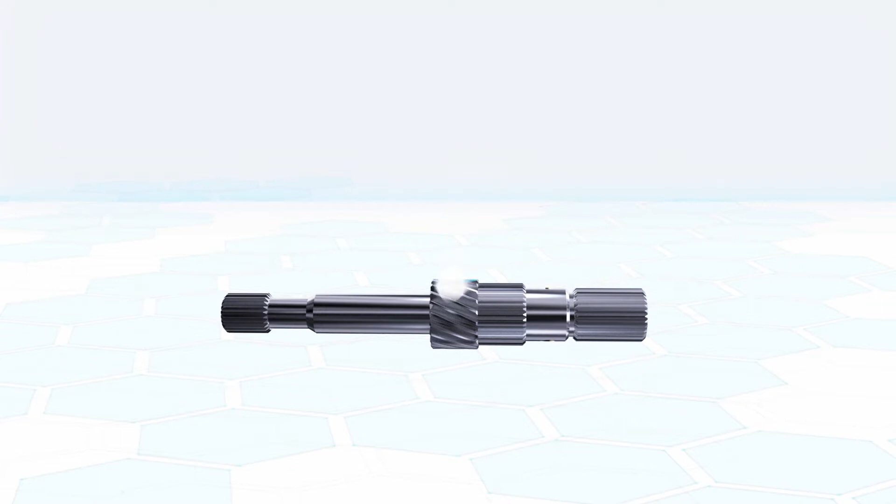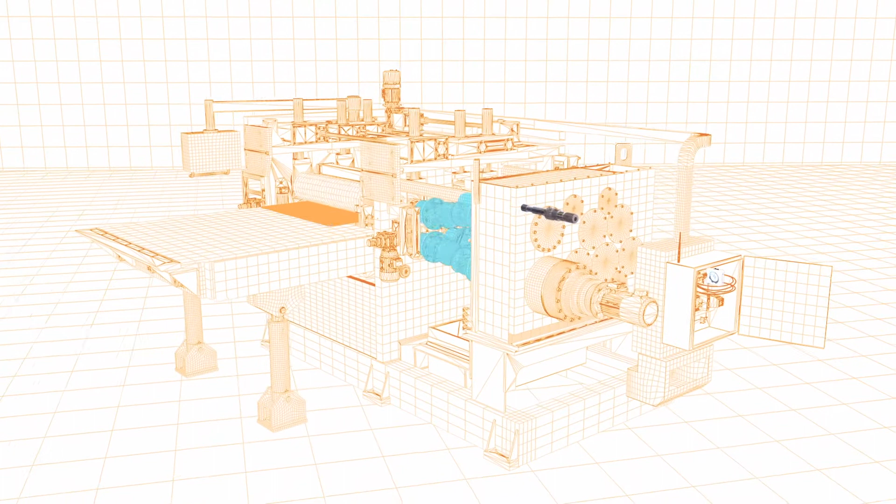Teach your machine elements how to feel. With the integrated sensors from CoRE sensing, you can transform a mechanical component into an intelligent sensor to record forces and torques where they occur, right in the middle of the action. Our sensor components monitor important components in the load path, such as shafts, bearings or gears. Important process variables are recorded directly and enable the direct assessment of the process quality.

The intelligent sensor components communicate wirelessly with our IoT gateway and can thus be used in the machine control system as well as transmitted directly to the cloud. The standardized sensors can be integrated into different machine elements and components. Current loads are displayed in real time, and any overload situations are stored in the component history and can be read out and analyzed at a later time.

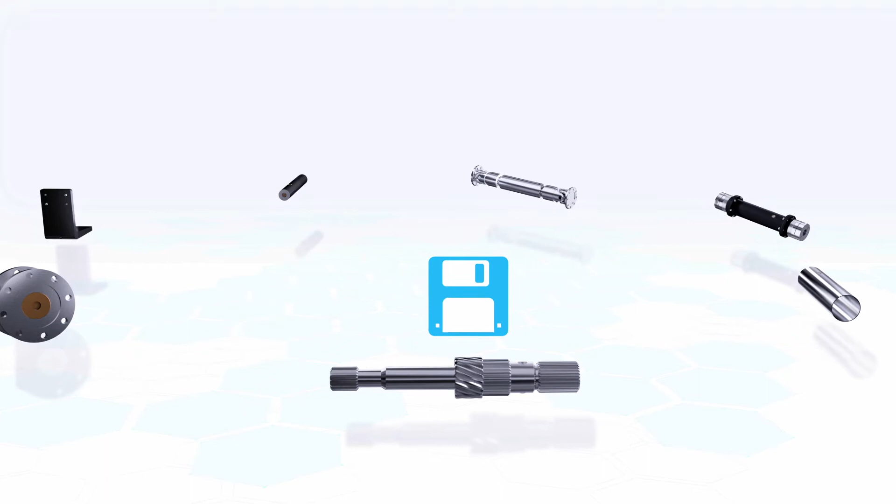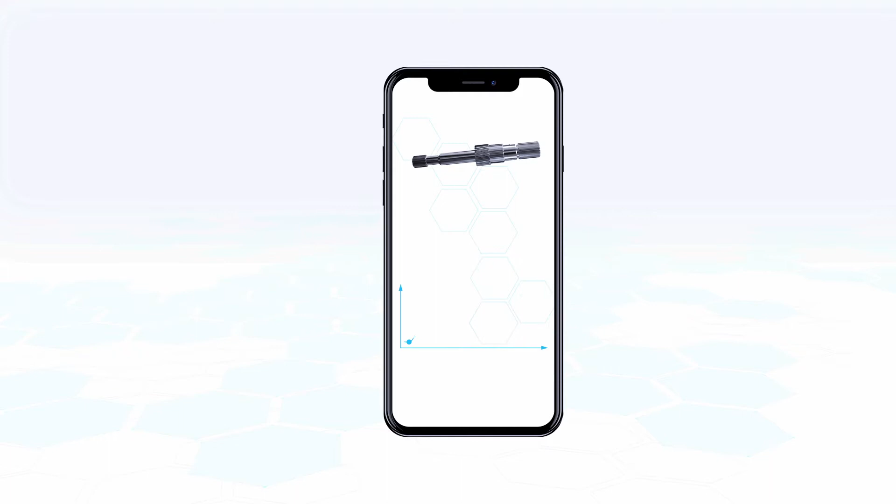Connect your smartphone or tablet via Bluetooth to the intelligent sensors and display and evaluate current and past sensor data. With your own customizable rules, you can set trigger points to automatically log the measurement data in the event of an overload and read it out from the sensor later.

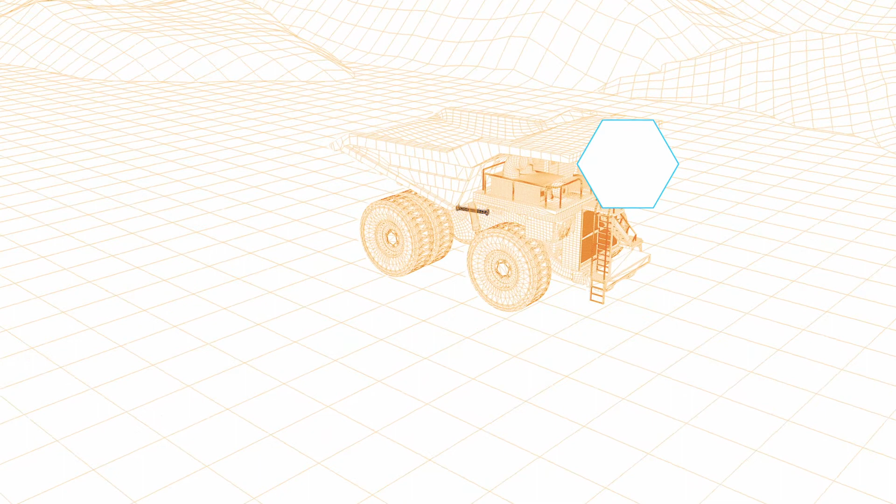Our sensors are protected inside the component and are therefore suitable for harsh environmental conditions, for example in commercial vehicles. By monitoring torques, systems can be controlled in an energy-efficient manner, and maintenance intervals can be estimated according to requirements. This is done with measured loads instead of estimated data.

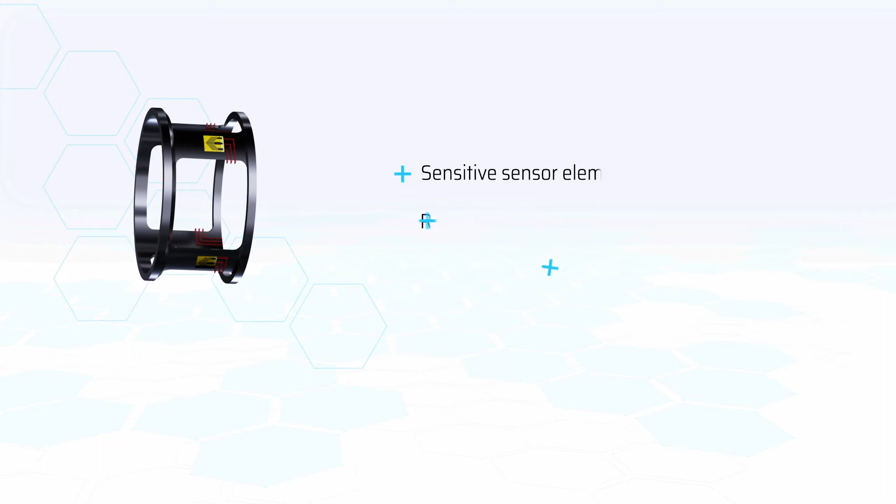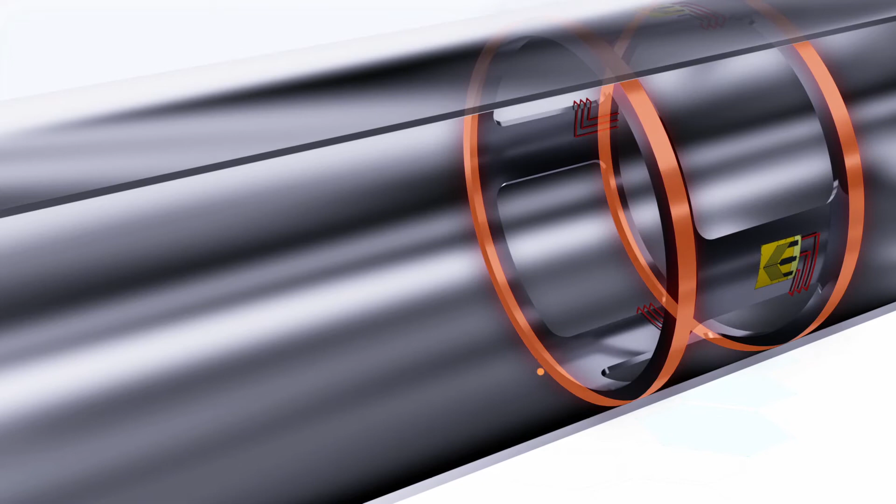But how does the sensor work, and how does it get into the various components? The sensor elements detect loads with the help of the proven strain gauge technology. These universal sensor elements can then be integrated into tubes or drilled components. Our patented integration process fixes the sensor element firmly inside the component. Every load on the component is thus detected by the sensor element.

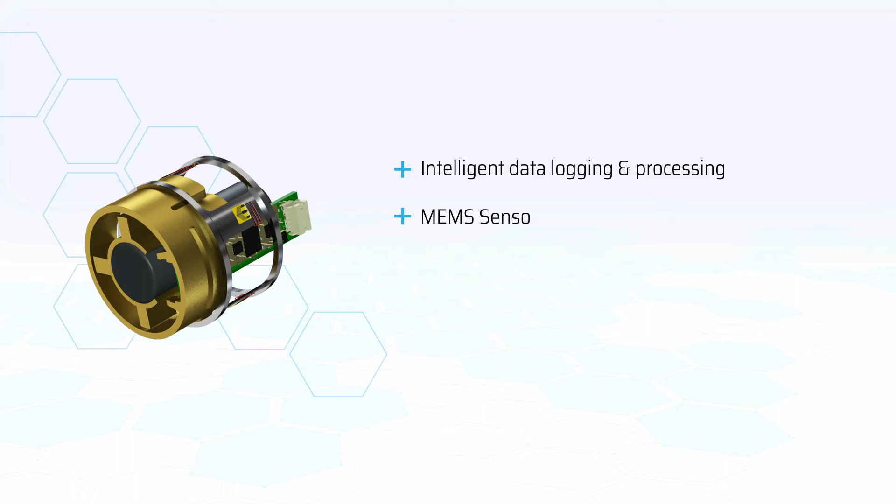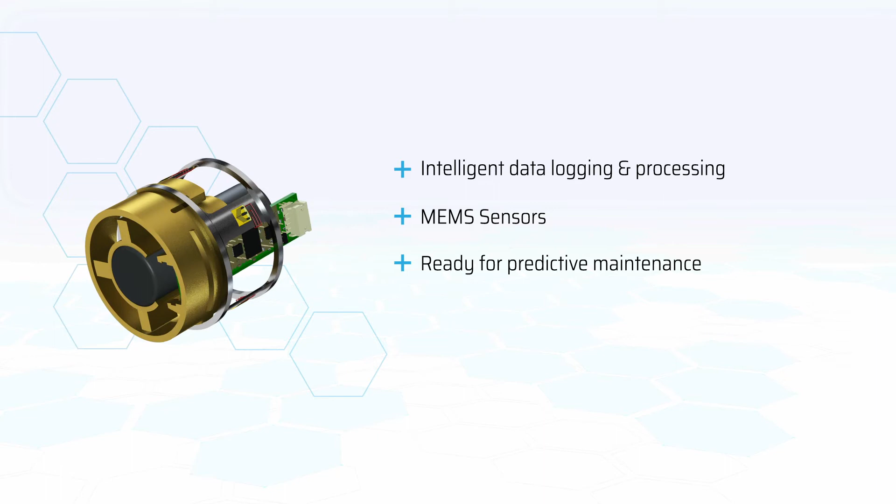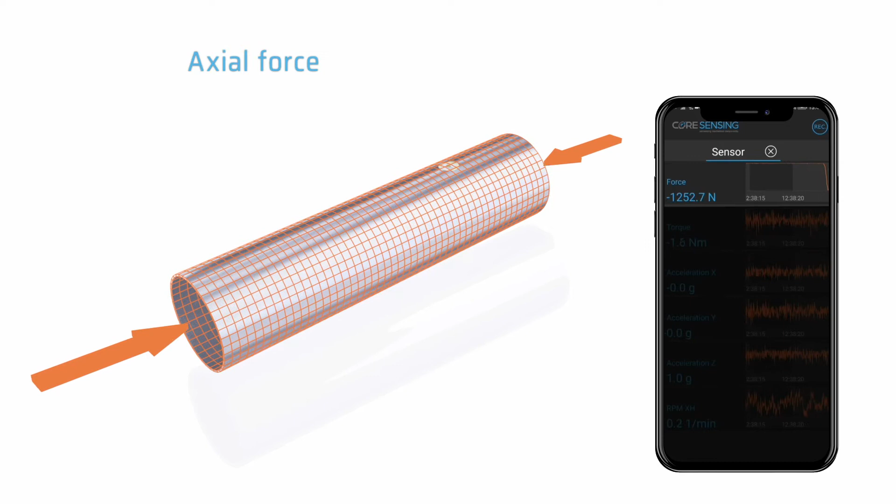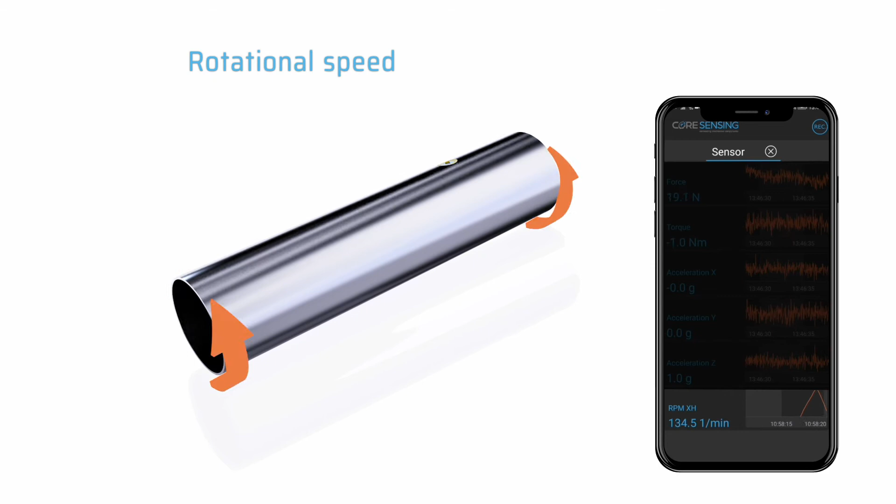The energy-saving and intelligent measuring electronics offers smart features that go far beyond the detection of the sensor signal. Intelligent event recognition and data processing based on artificial intelligence offers limitless possibilities for your application. The two-channel strain gauge amplifier records load variables such as torques, axial forces, transverse forces or bending moments, rotational speed, 3-axis accelerations, as well as the temperature.

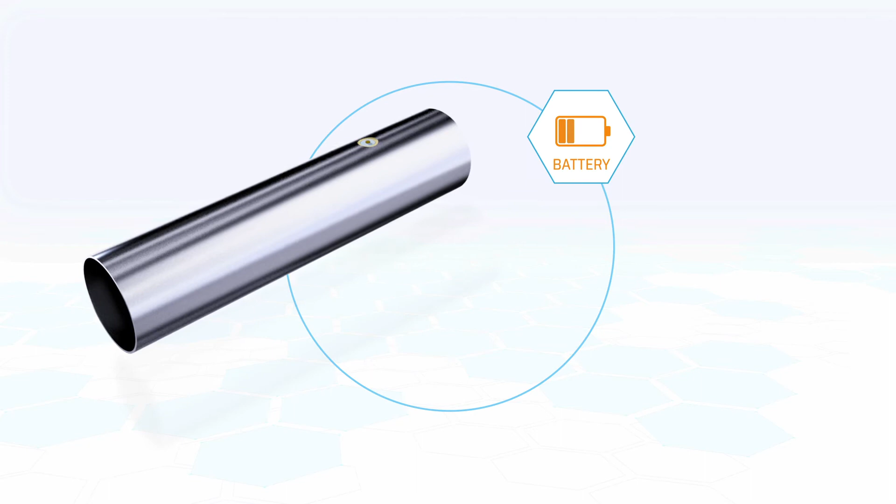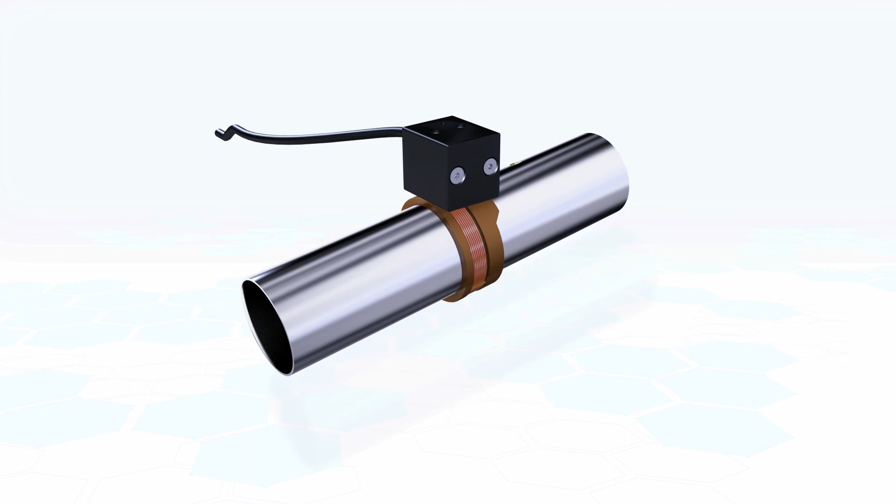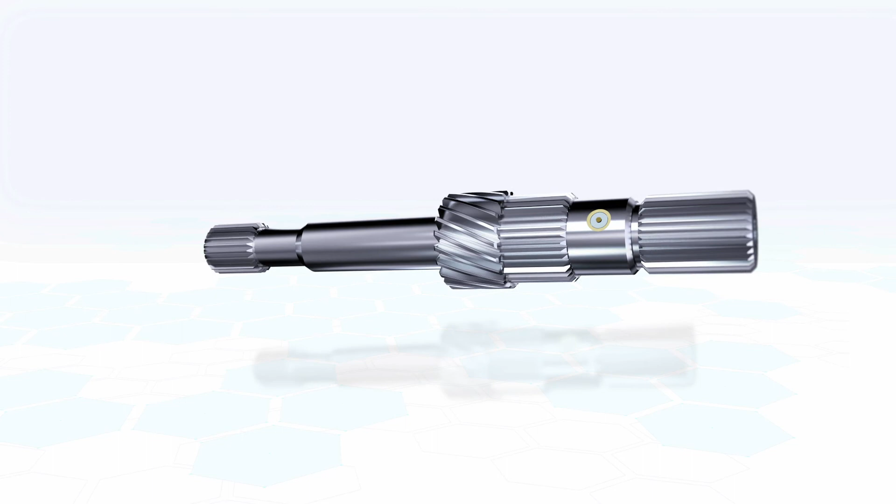The intelligent energy management enables battery runtimes of several months to years. This means that the self-sufficient sensor components are perfectly protected from mechanical influences and environmental impacts. An inductive energy and data transmission solution completes the portfolio and enables uninterrupted continuous operation with the highest sampling rate and lowest latency. Whether individual pieces or series application, our sensor is ideally suited for drive shafts as well as non-symmetrical components and measures exactly the mechanical parameters you need for your application.

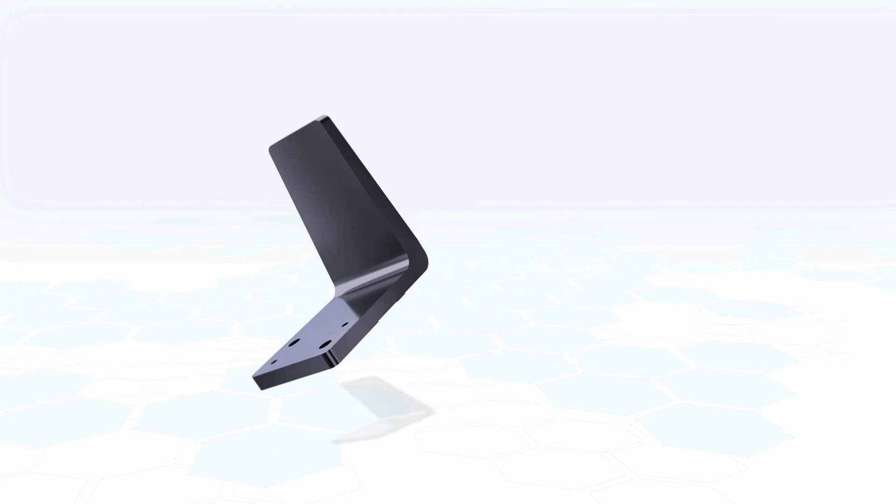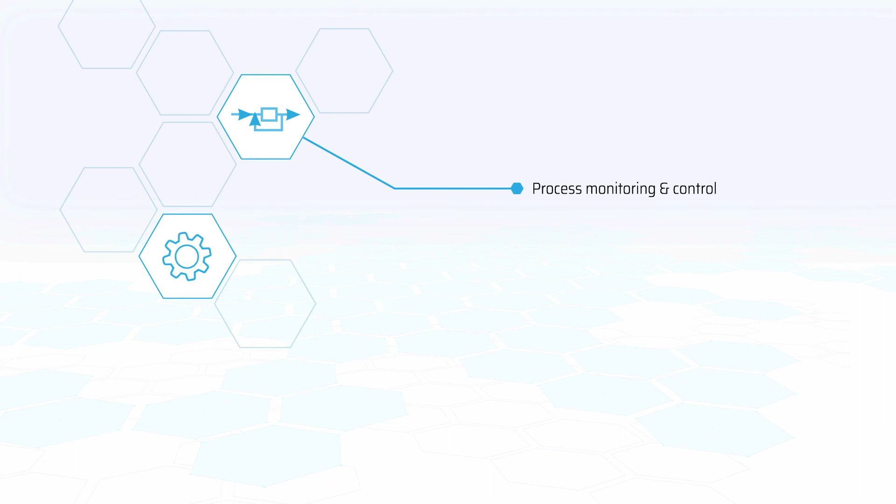Let us convince you of the many possible applications for smart machine elements and how they can help you to monitor and control processes, predict maintenance intervals and machine conditions, and reliably record operating loads.